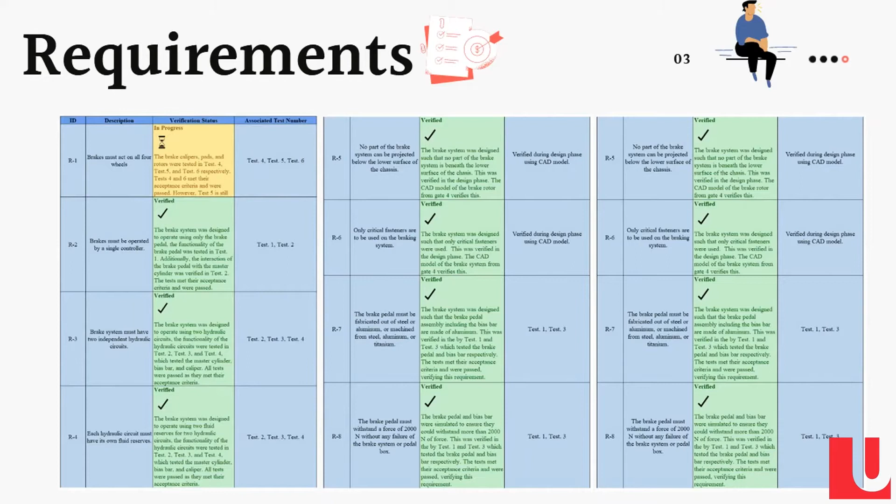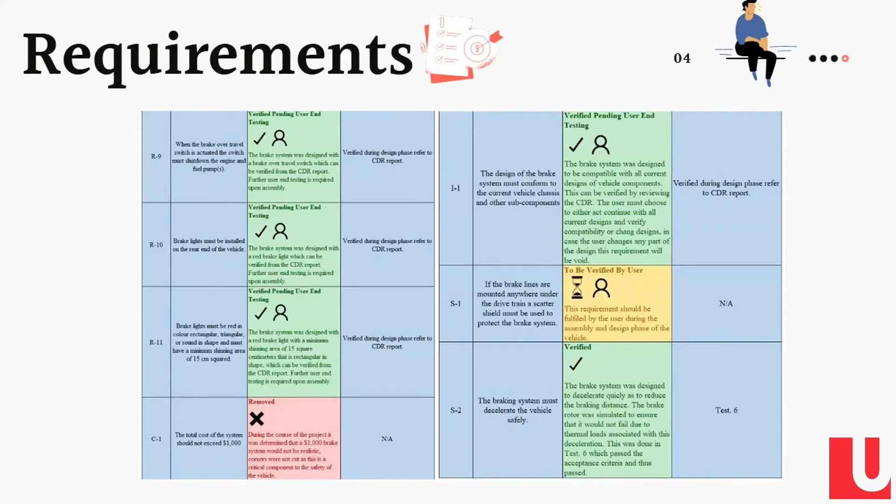Now I will showcase some of the progress made thus far throughout the Capstone project. We have designed the brake system, verified our requirements through simulations, and designed a test rig to verify the requirements with further confidence.

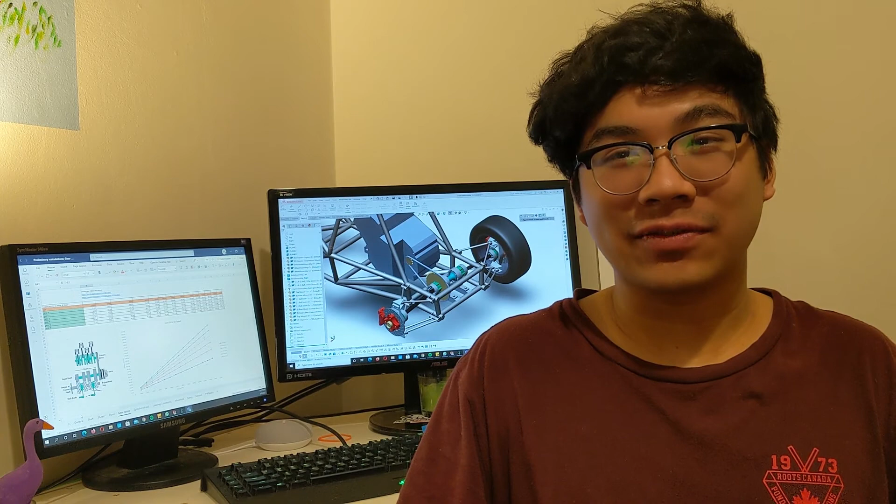The drivetrain is comprised of several components working in harmony, custom made for Lassonde Motorsports' current generation vehicle, which aims to hit the track as soon as competitions open back up again. Among our deliverables, we define manufacturing methodology, assembly instructions, and testing procedures.

We have spent countless hours over the past 8 months working from the ground up, starting with how LM wants the vehicle to perform, and ironing out the small details with other teams.

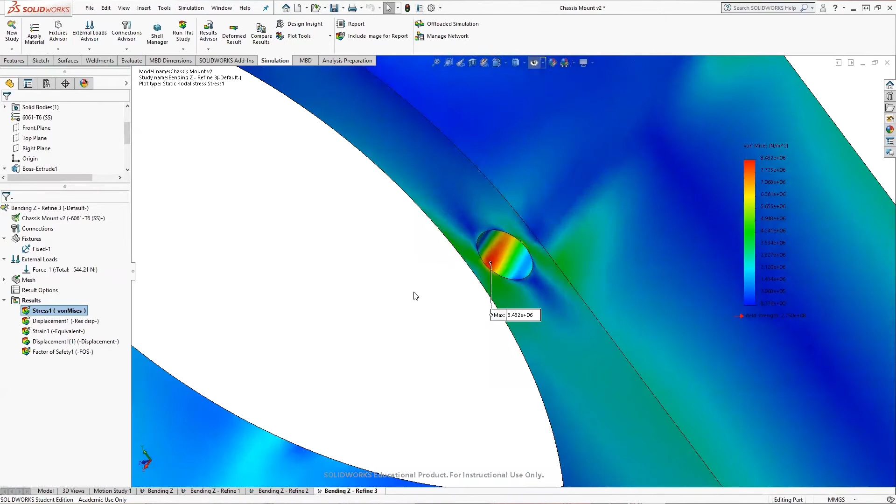The result is a drivetrain system made from mostly custom components, with the addition of a select few parts bought online and picked off the shelf. Going forward, LM will integrate the system into their vehicle, moving them one step closer to being competition ready.

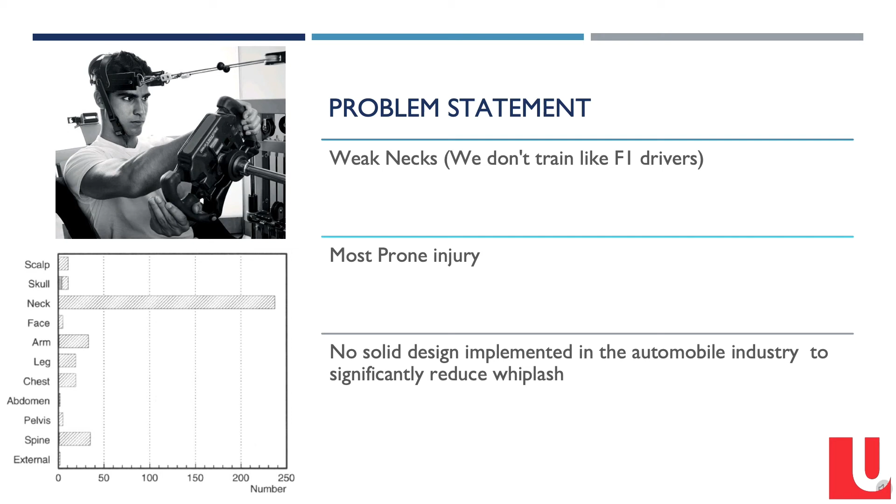Most vehicles have protection built on the outside of the car with reinforcement bodies and crumple zones. However, there are very little mechanisms within the car to reduce the most common injury of all.

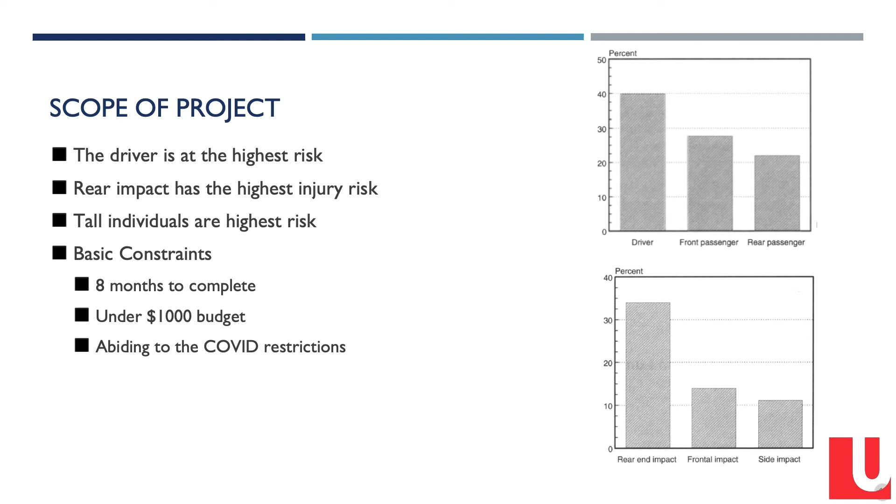The scope of this project focuses on the research results we came across, such as the driver being at the highest risk, tall individuals being at the highest risk, and rear impact being the most common to cause injury. Further operational constraints were based around the 8-month course length, $1,000 budget, and general COVID restrictions.